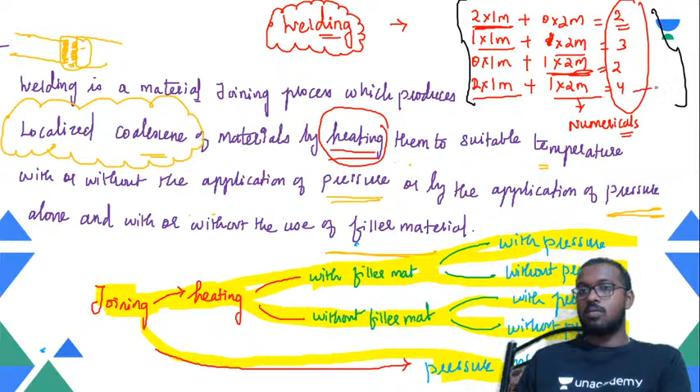So going back to the content, these are the topics that we have completed. In the previous class I said, and you can see here, 2 one-mark questions, or 1 one-mark and 1 two-mark, or 1 two-mark, or 2 one-mark and 1 two-mark. So you can easily expect 4 marks from this. And the two-mark questions will always be numerical ones. We have given the definition, what it means. This was written in the previous class. For all your information, please make a note of it.

So about welding, we have just got this idea, right? What is meant by welding? Welding is a material joining process which produces the localized coalescence of materials by heating them to a suitable temperature with or without the application of pressure, or by the application of pressure alone, and with or without the use of filler material.

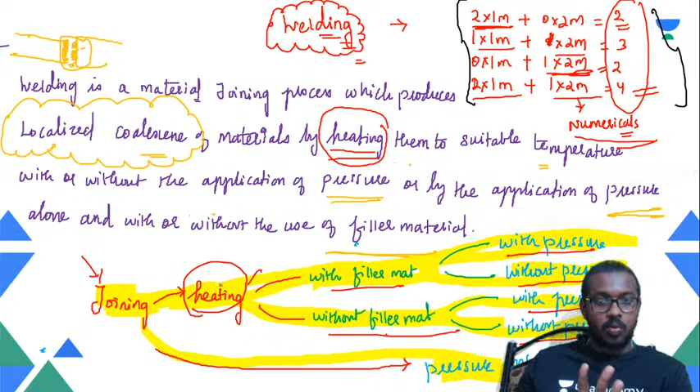Students, joining is all about heating the material with the filler material or without the filler material. If it is with the filler material, if you are doing the heating operation to join, it can be with pressure or without pressure. And without filler material, you can apply with pressure or without pressure, just purely heating, or just the pressure only. That is what the above statement is all about, that I have just broken down and presented here. Maybe this would be really helpful for you guys.

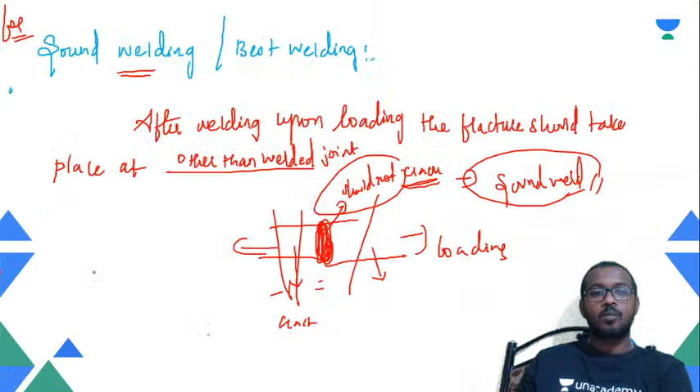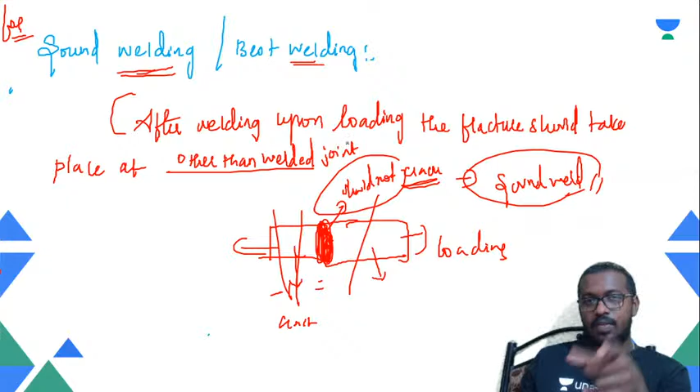So for sound welding and the best welding, my dear people, you have to understand these are some interview-based questions, simple questions. This is the material which is welded, two joint materials which are welded. After welding, if you are loading the material, upon loading, the fracture should take place at a point other than the welded joint. It should not break here, it should not crack here, but at other points. Correct? So this is an important note my students need to understand. Please make a good note of it.

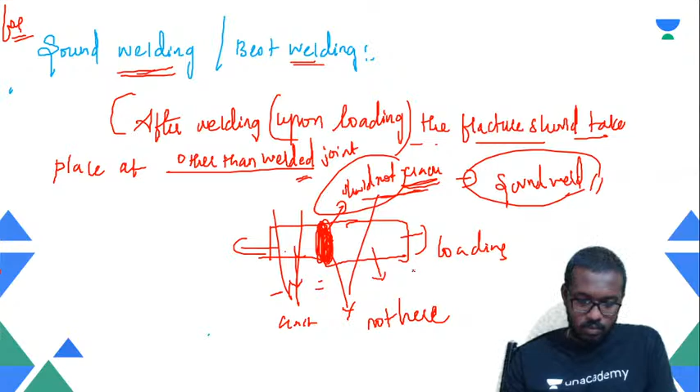So these points we have already discussed: advantages and limitations. One point alone I have to reiterate here. We say that permanent joining is an important advantage of welding. But the same permanent joining becomes a limitation because during repairing and maintenance, you have to break down the permanent joint positions for repairing. Right? So that is the only place where it becomes a problem. So kindly make a note of it.

So I'm looking into the chat box through my mobile phone, so please do let me know if you have a message to convey. I'm glad to reply you back. Students,

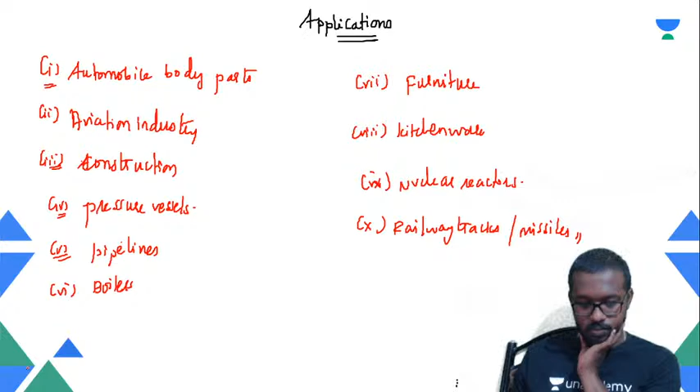Under solid state welding, we know that the parent materials are not melted; in the solid state itself the welding takes place. So joining takes place, where you have the classification of pressure welding, friction welding, explosive welding, ultrasonic welding, diffusion welding, and forge welding. And in liquid state welding, you know that there are many classifications.

It stands for the two materials which are supposed to be joined being taken to their liquid state. That is, the heat produced is able to melt the material. Operating temperature is above the melting point. All these words we can include to define the liquid state. So liquid state welding is majorly classified into chemical and electrical. In electric type, we have arc welding and resistance welding, with subclassifications. And in chemical, you have gas welding and thermite welding. In gas welding, you have the subclassifications.

So liquid state could be autogenous welding with no filler material being used, or homogeneous welding with filler material that is the same as the parent material, or heterogeneous, where the filler materials are different from the parent materials. These cases are for alloying, where you want the filler material to become the alloying element. So kindly make a note of these points also.

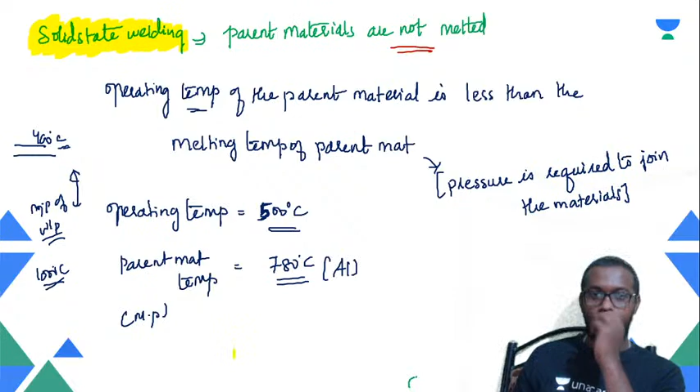And you can have brazing, soldering and braze welding operations over there. So please make a note: solid state welding, liquid state, and solid and liquid state are all defined here.

So coming to the next point, we have also discussed the weld techniques, where you have forehand and backhand, and weld positions, where we have four types: flat, horizontal, vertical, and overhead.

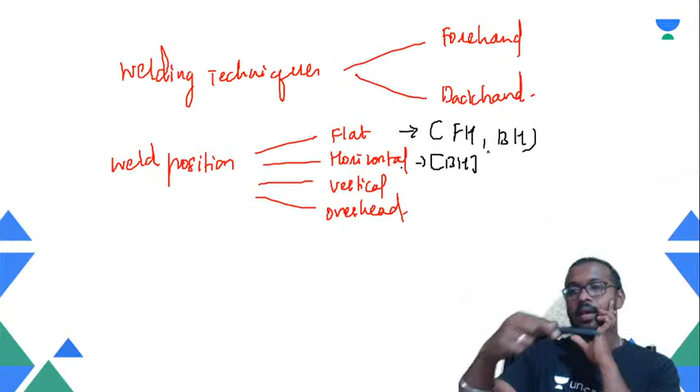In flat, you can do both forehand technique as well as backhand technique. Here there is a shortcut to say it should be backhand technique, because it will not disturb your line of welding. You know where exactly the welding has to be done. That is only possible through the backhand, where your flame comes first before your hand. Please make a note of it. That is an important line, my dear people. Hope everything is clear now for you guys.

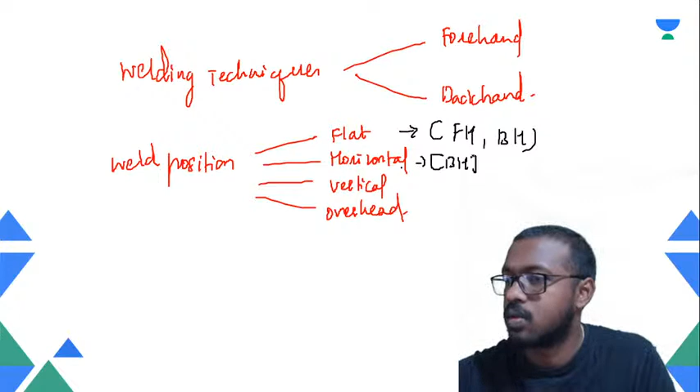So flat with forehand technique and backhand technique. This is a shortcut: HB pencil. We used to say 2HB, HB pencil. You can remember this for the backhand.

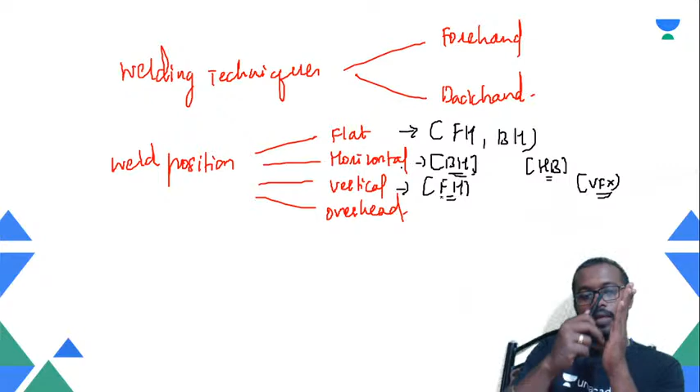Vertical is where it is forehand technique. You can remember the VFX effect, the graphics effect, because the forehand technique will help prevent the molten metal from falling. If you do the welding vertically in this manner, the force from the arc will help the molten metal remain there, rather than doing it in this direction. Otherwise, the molten metal in the welded area will fall down, because the flame, the arc, is already going up. So that is a problem. So we go for the forehand technique.

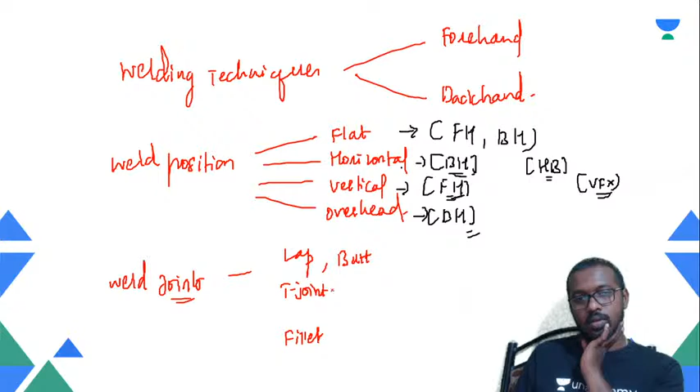And overhead is again where you go for the backhand technique. Please take a good note of it. And the next one is your weld joints. So you know that we have the lap joint, butt joint, fillet joint, T-joint, corner joint, edge joint, and so on. So now, as we know, the title is all about welding terminologies, a few terms that we all have to remember. So those are the points that I wish to share with you. Please have a good look into this content right now, guys.

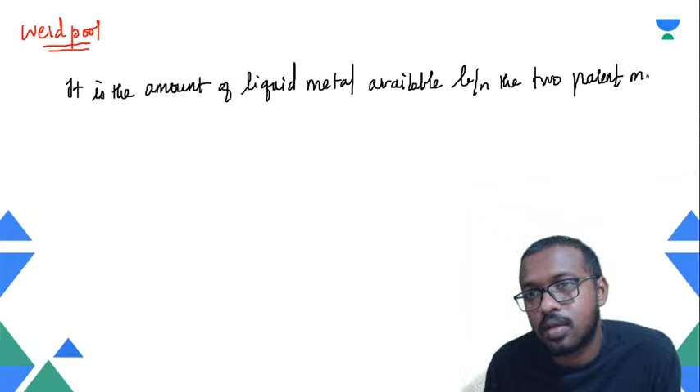It is the amount of liquid metal available between the two parent materials before joining. Okay, before joining. So we can express it in such a way, so like this we are talking about.

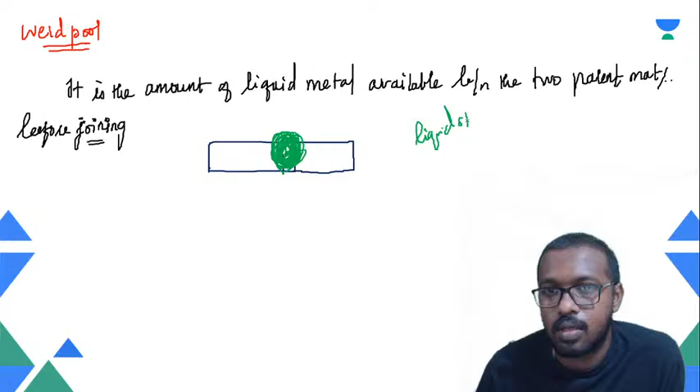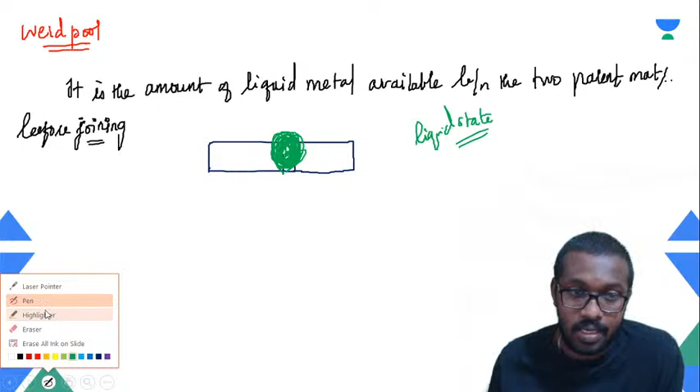Okay, weld pool. So it generally happens in your gas and arc weldings. Liquid state welding is where we can preferably say this. Okay, so it is the amount of liquid metal available between the two. Okay, sir, that is all fine. When we talk about once it gets cooled down, what will happen? In other cases, like resistance welding, we have these points to add. Even there, this is a more interesting term. If you have any points, please do share your thoughts here.

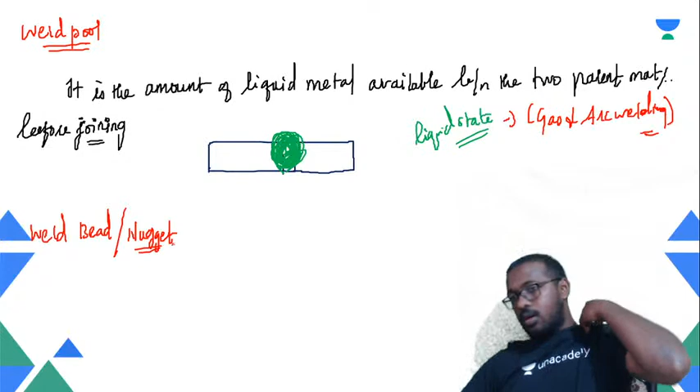So the weld bead or the nugget that we say, especially nugget is in resistance welding. We can particularly say bead is for gas and arc weldings. Okay, we are talking about it in the arc welding factors. So weld nugget, the amount of material which is added into the workpiece or parent material. The amount of material which is added into the workpiece.

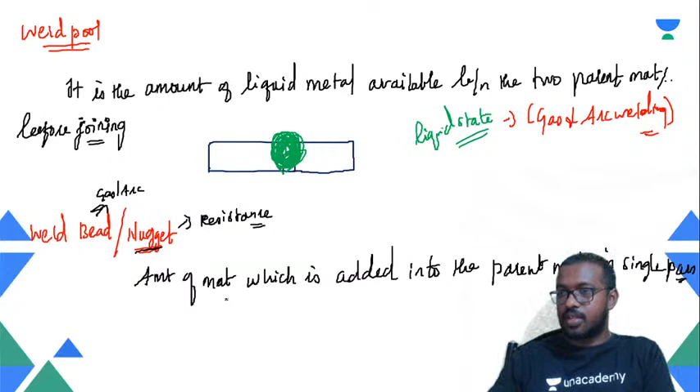In single pass. Okay, in single pass we are talking about. So the word bead is generally what we say in gas welding and arc welding. We can use the word nugget in case of resistance welding. Look at the terms. This is how we interchange the word. Kindly make a note. So next is an even more interesting factor. We are calling it penetration.

Penetration. So penetration, let us draw a diagram. It is the depth to which the filler material can be penetrated into the base material.

Okay, it's not only that way, the arc itself can also penetrate. So it's all about the penetration of the arc or the gas flame or the filler material itself we are talking about. It's a simple note: why we connect it with the filler material is because it is an additional material in the liquid state that can penetrate into the joints. Correct. So the depth to which, with reference to the filler material, we are defining it here.

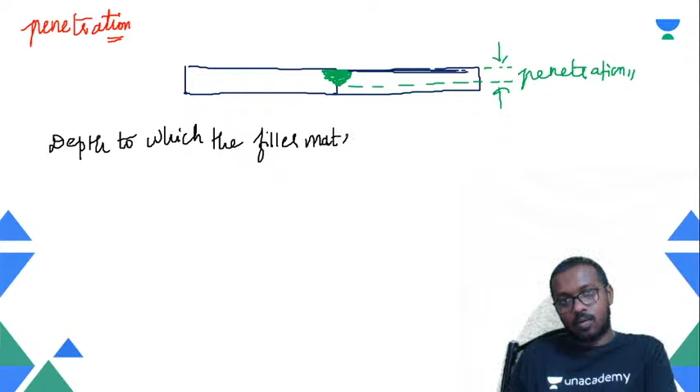The depth to which the filler material can be penetrated into the base metal. So this is what we call penetration. Okay, penetration.

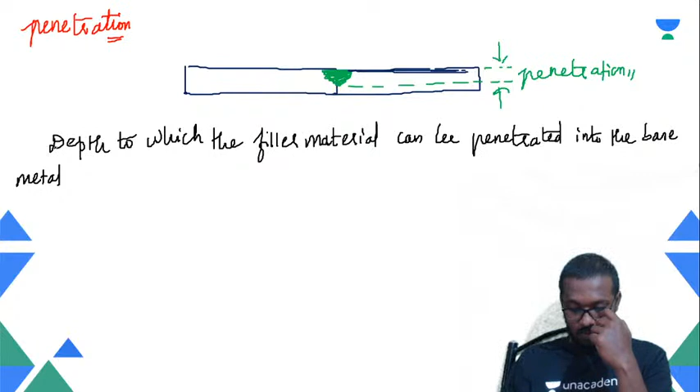And few more points on the rest of the things we'll discuss. But if you have any doubts, kindly let me know. I'm just looking at the chat box. Okay, all good so far. Please do it.

Next is all about root gap. Okay, the root gap. It is the shortest distance between the two materials before joining, especially in cases of joint preparation when it is made. Okay.

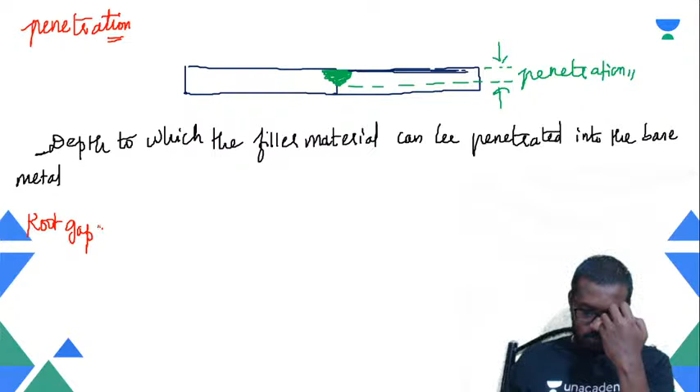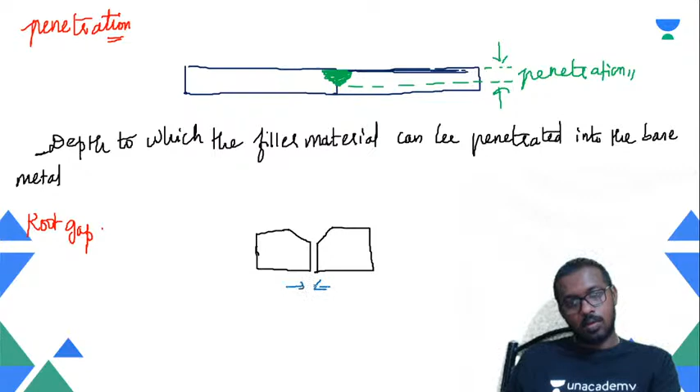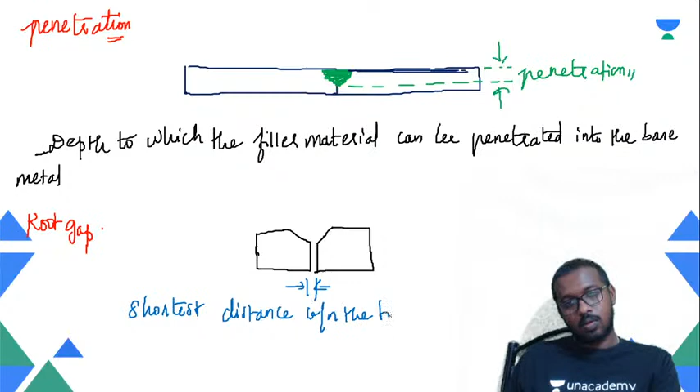Especially in cases of your joint preparations, it is the shortest distance between the two parent materials before joining. Before joining. Okay, before joining we say, yeah.

Okay, yes. More chat messages. No, fine. So I hope you guys are noting it down in parallel.

Let's proceed to the next one. We are calling it the toe. This especially happens in the case of fillet joints, the toe. So you can understand this through the diagram that I draw here. Okay, so here if you draw,

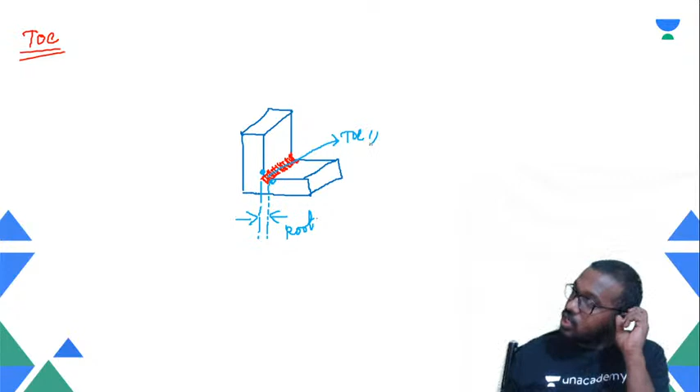right? So here you can call these two terms. There are two terms that I'm going to present here, which are the root as well as the toe, both of them, excuse me. So root as well as the toe we are talking about. So the root is here and the toe is here. So what is that? The junction between the parent material and the weld face. The junction between the parent material and the weld face. Okay, so let me write it here.

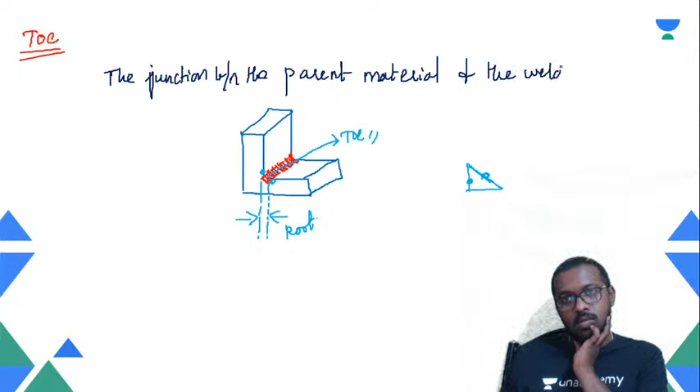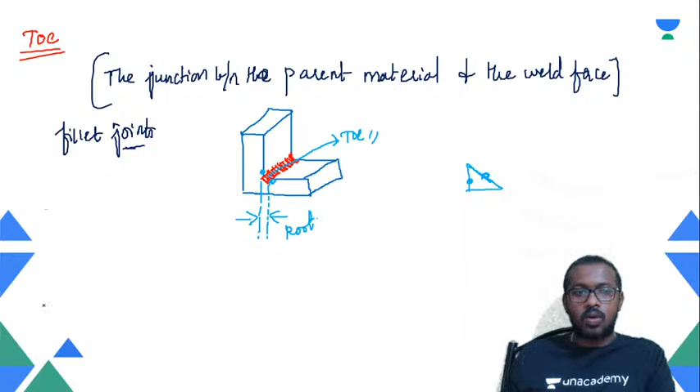Junction between the parent material and the weld face. Please make a note. Right, and it is the case in the fillet joints. Please make a note. And the next one is about the root. So one earlier that we have seen here is all about the root gap.

Here is the root. It is the point of the deepest penetration in the fillet joint. It is the point of deepest penetration in the fillet joint. Okay, how deep it is. So you can see the deepest point, right? So this point to that front, how much from that you can say.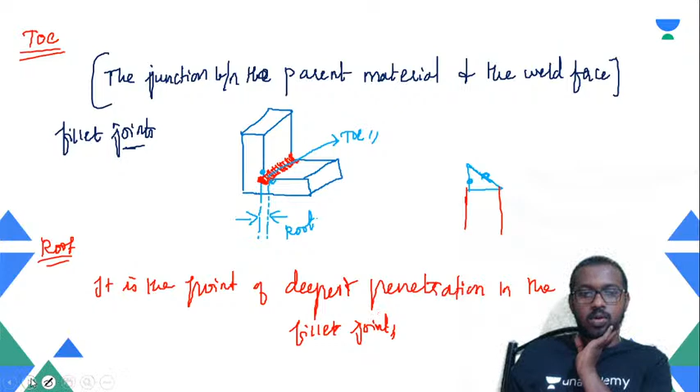So here it is all about the root. So you can see the difference between both the terms, right? From the toe to the root and everything. And one more point is about the throat. Throat is another point from the same triangle we can introduce when a fillet joint is being made. Okay. The shortest distance between the root and the weld face. Shortest.

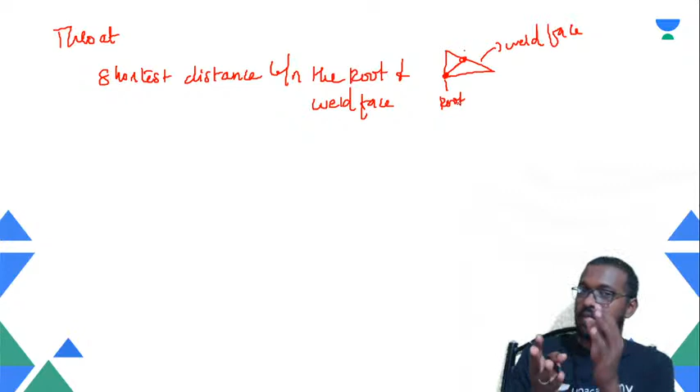You know that this is the weld face, and this is the root we are talking about. So from that point to this depth, we are calling it as throat. So additionally, these points are collectively from gas or arc and everything, right? So I have to introduce these further points which we might come across in arc welding, but I want to connect it here as well. So I'm giving a new page for that, which we are calling it as crown. A very important diagram which we need to know here.

So I don't have special tools, so I have to go with the simplest hand sketch. And you know what, the better engineers or the best engineers are the ones who are able to perform in the least helpful conditions. They are able to show up. Okay. I don't think this is required here for now.

Crown, let me bring it here. Okay, crown, let me say here what is the point. So here we have to particularly share the point. Here is how the crowning takes place, right? The welding would take place like this. Right? So until this point we are talking about. So this crowning. Can you see the point here? So you can understand these three terms I'm reintroducing. One is a point we have already discussed.

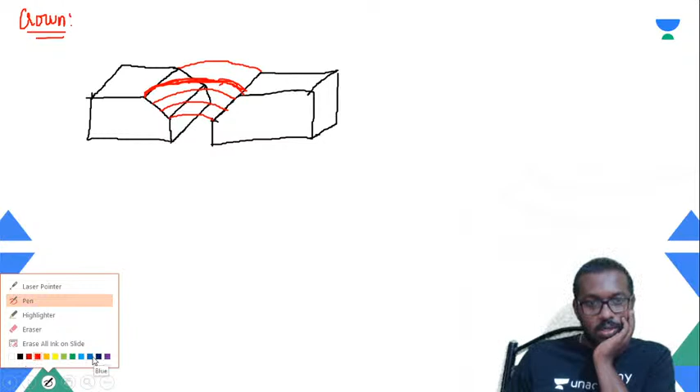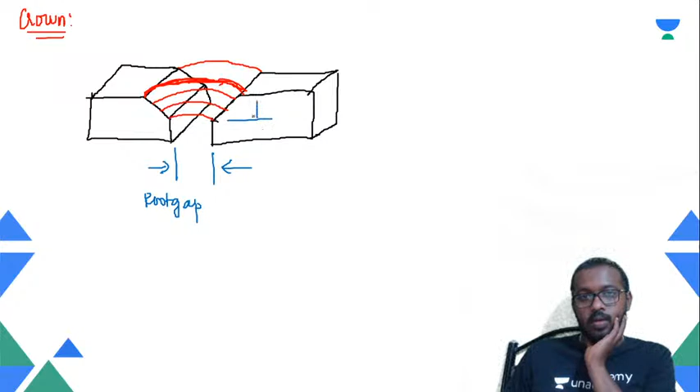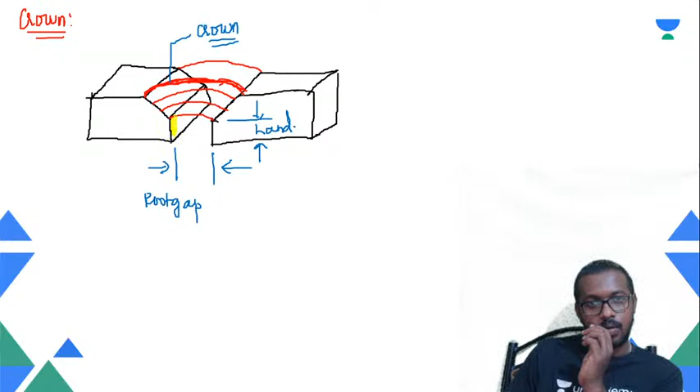What is this point, sir? We are calling it as a root gap during the joint preparation. What about this point? We are calling it as land. And what is this? We are calling it as crown. So the straight portion of the plate. This is the straight portion of the plate. I'm just painting it. Correct? The straight portion we are talking about.

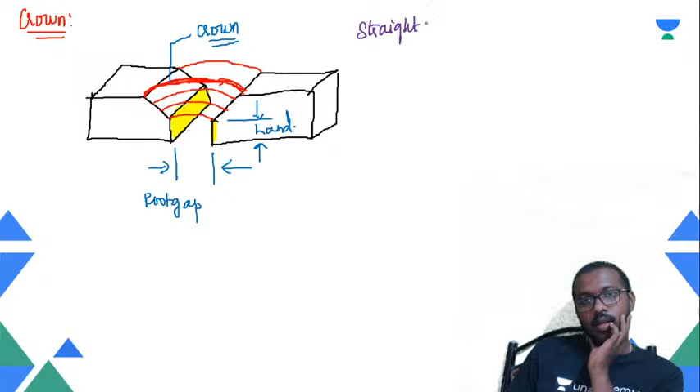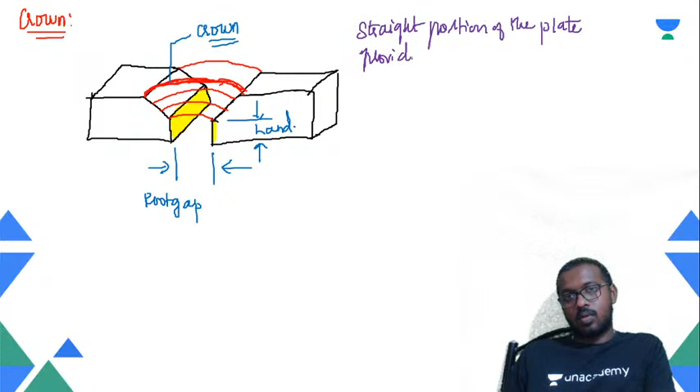The straight portion of the plate provided at the bottommost point of the joint without any joint preparation, right? We are calling it as land. But we know what is meant by root gap otherwise. So root gap is a point that we have already discussed.

So it's a straight portion of the plate provided at the bottommost point of the joint without making any joint preparation, that we are calling it as the land. So we don't have any kind of joint preparation over there. No V, no U, right? No J joint, nothing will be there.

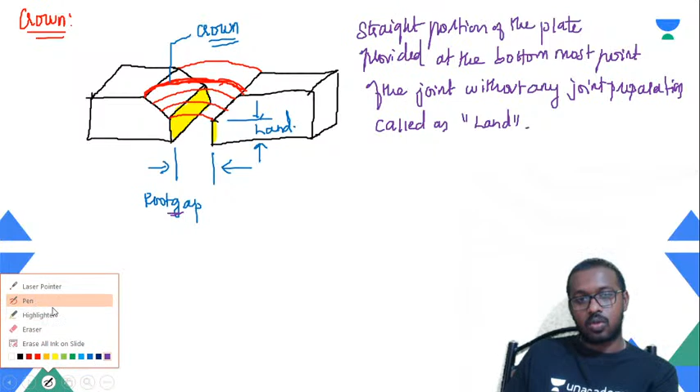So in the non-favorable conditions, when you are able to present yourself with a freehand sketch, that's where the true engineer evolves, is what I used to hear from my professors in my college days. Because in engineering drawing, we all go with our draft and everything, but the drawing is all about making the other person understand, right? Without the language barrier, you can still convey through the drawing what your expectation is. So that is the most important thing. So we have to always be ready for presenting it.

So what is meant by crowning then? The excess material more than what is required. So you can see this. This is the line we are expecting. So above this, all this material is excess, right? All this material becomes excess. The excess material provided over and above the surface of the plate.

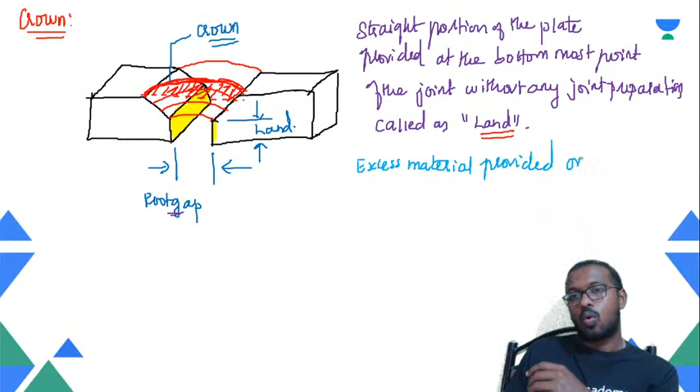Excess material provided over and above the surface of the plate is called crown. Is called crown, my dear guys. Okay, so this is an important term which we all have to note down. So next comes your deposition rate and the number of electrodes as well. So some terminologies that I want to connect with you so far.

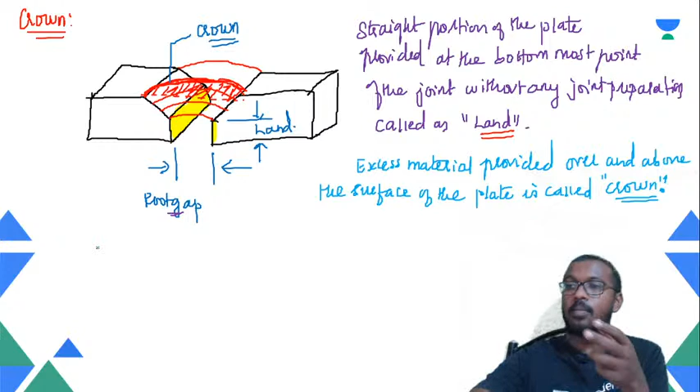How many number of electrodes that would be required, there is where this crowning term comes into picture. Okay, please make a note of it. The crowning term comes into picture when there is a term on the number of electrodes. Okay, so we will be using those terms. Please make a note

in the upcoming classes. Now to the next heading, we are calling it as the deposition rate. Okay, deposition rates. This is actually in your kilogram per hour condition we are talking about. So the amount of material, like the melted parent or the filler material, whatever it could be. Okay, please underline this word. The amount of material which enters into the

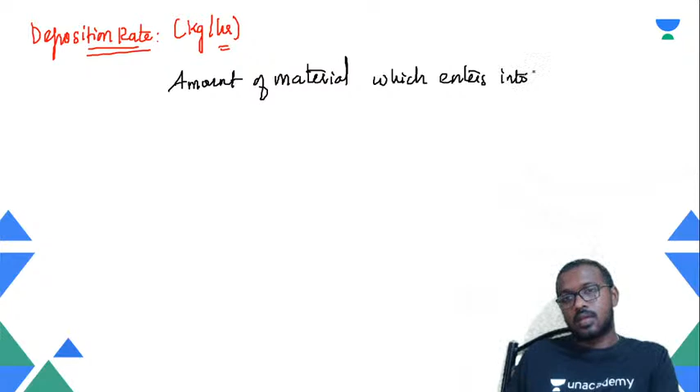parent material. So here, when we say the amount of material, I said to underline. You know why? It could be the melted parent material or the filler material. It could be anyone. So amount of material which enters into the parent material per unit time. Again writing it per unit time. Okay, so it's more about a question in the numericals. You can expect this kind of a one. So please make a note of it.

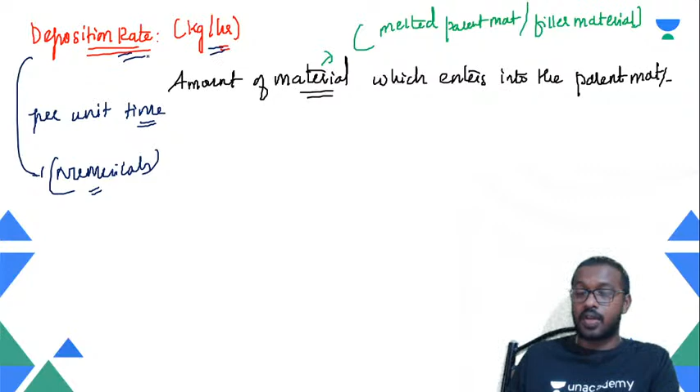So it's all mentioned in terms of kilogram per hour, and this deposition rate has a lot of connection with your direct current straight polarity, direct current reverse polarity as well. Between them this deposition rate plays a huge role, and that's where your non-consumable, consumable electrodes. So all these are getting interconnected now. How many number of passes will it be if welding speed will be high or low? Okay, high or low, and

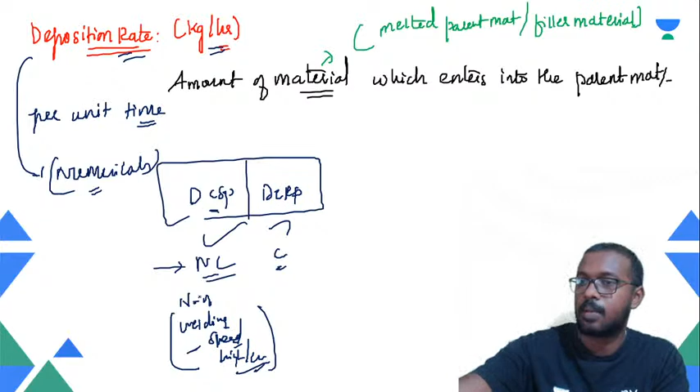these factors. So for the non-consumable, the DCSP, the welding speed, and all the deposition rate, these are well connected between them, my dear guys. So have a good note of this. I hope it is clear to all of you in this regard. Make a note. Okay, so the deposition rate, and the next comes your flux.

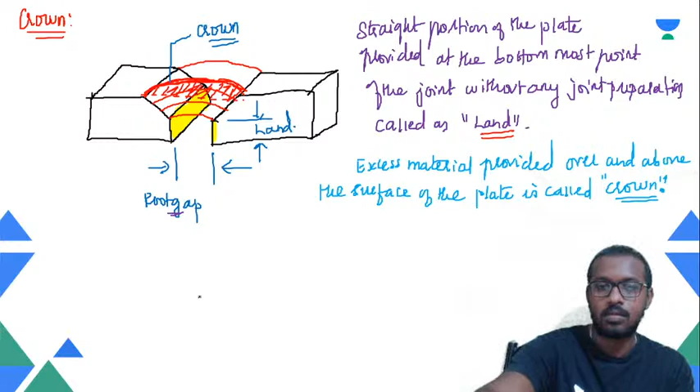Flux. So next is your flux form. Flux and filler materials, we try to complete it. So flux is commonly used to deoxidize the material, especially in case of your gas weldings, and prevent it from getting oxidized. Okay, and the flux helps in forming the slag over the weld bead. So you can see the word what I have used, bead, that is all for your arc and gas weldings.

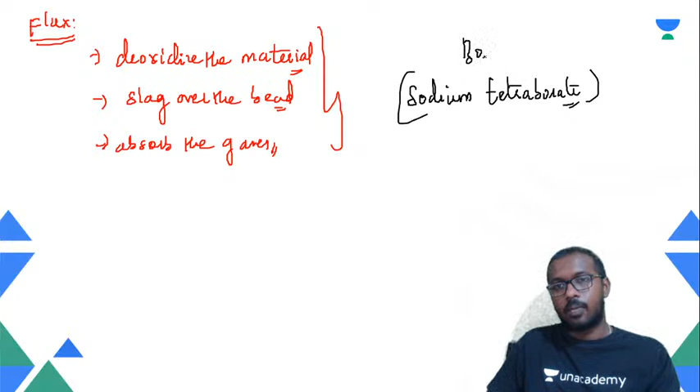Remember the term. And it also absorbs the gases. So that's how the deoxidation takes place. If not, how it can be done, right? So this is how the deoxidation takes place. The commonly used flux materials are the sodium tetraborate. There are a few more, but let us understand the sodium tetraborate, commonly called as borax. This is the flux material majorly used.

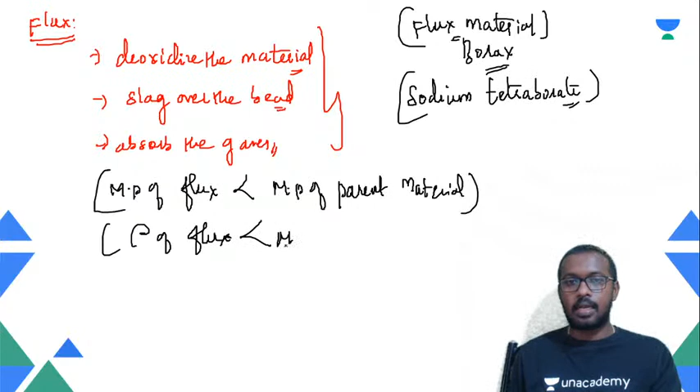Okay. The melting point of the flux should be always less than the melting point of the parent material. Only then the flux can easily protrude into the weld pool and prevent the material from oxidizing, right? And also the density of the flux should be less than the density of the parent material here. Please take a good note of it, the parent material. Okay, it should be less here as well. Students, please have a good note of it.

Any messages here, most welcome. I would like to hear from you people and clarify the doubts of yours accordingly. So just giving you a minute of time to note down these points, and then we can proceed further accordingly.

Okay, so about the gas welding, and we have one more point on the torch angle also to complete. So those are the points I would like to complete prior to getting into the gas welding topic. So please make a good note of it, guys. And we'll move on to the flux filler material right away. Okay, filler material.

So the filler material is all about the addition of the material. It could be same as the parent material or different from the parent material. But especially look at the condition why filler materials are generally used. Okay, why they are used. For this reason. And here.

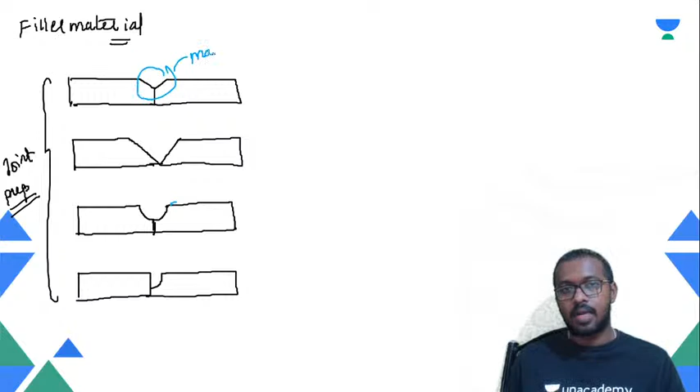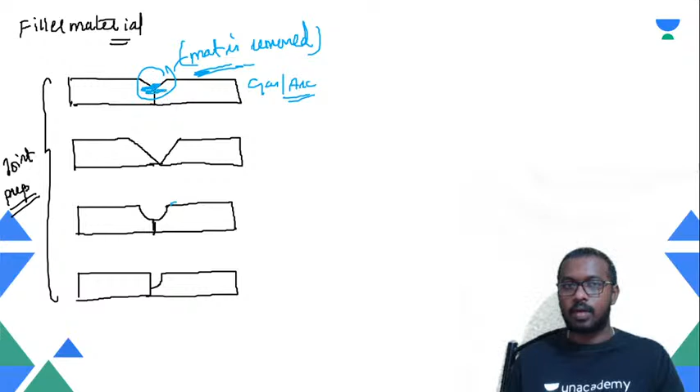What you can see here, joint preparation has been made. So what I would like to share, my dear guys, is the addition of material. See, the material is already removed from this place, correct? Now if you are trying to weld the material by gas or arc, between these two, the material will melt and deposit here. So what about this area? It is unfilled.

To fill the unfilled area, we use filler materials, correct? The gap cannot be filled because there is no metal to fill. If these two materials are to be joined, and if you melt it, sufficient material will be available because no cut has been taken. But since the material has been cut in order, this cut is required in many occasions because the strength will be more, particularly over there.

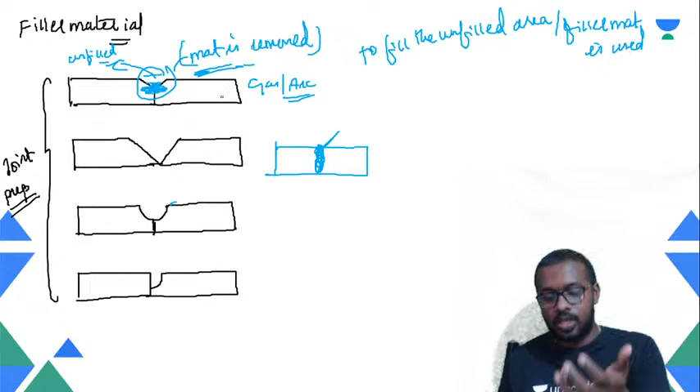So when there is a joint preparation made, especially to fill the unfilled area because of lack of material available at the production, filler materials are used. The addition of material could be either same as the parent material or different from the parent material, to fill the gap. This is where filler materials are used.

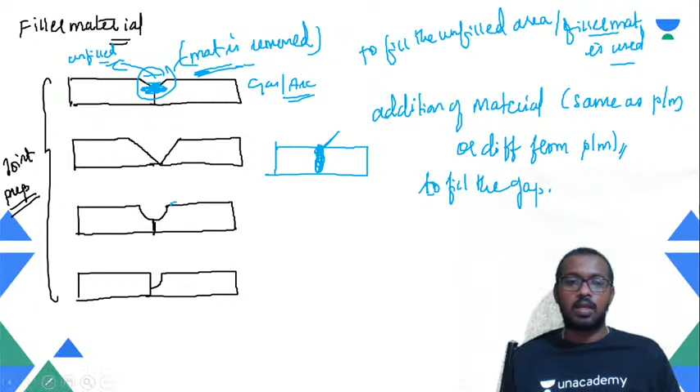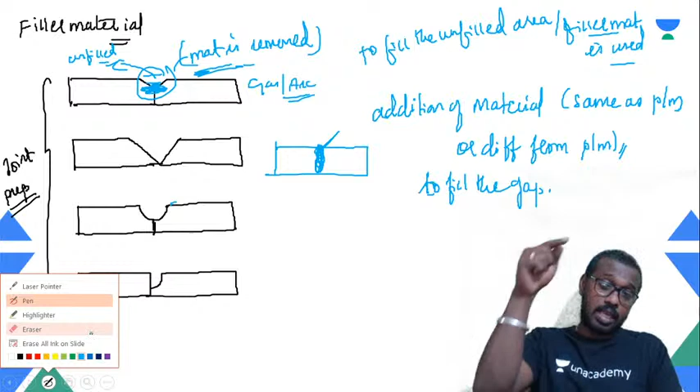It could be, like, two steels getting welded to be joined with a special joint. If I want to use a filler material, it can be same as the steel, same composition, same alloy. Or it could be any other material added as an alloying element, so the joint could become even stronger. Any properties I want to improve over the joints, I can do by adding a different material as filler. This I wish to convey to you people. Please make a note of it.

Good morning, sir. Good morning.

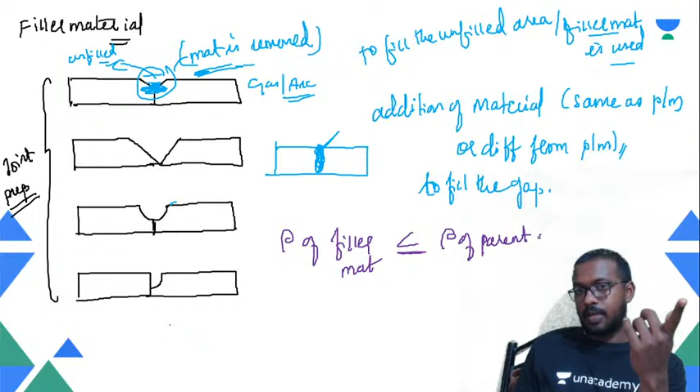So the density of filler material is less than, or could be equal to, the density of the parent material—the equal sign applies if the filler is same as the parent material. In the previous case we are not doing it because the flux will always tend to be of lesser density and lesser melting point as well.

So the melting point of the filler material is less than or equal to the melting point of the parent material. Students, please make a note of this. So next class will be even more beautiful, I can assure you.

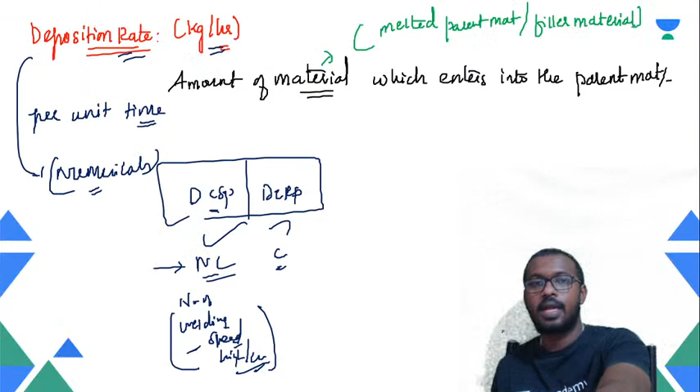So just giving a quick recap of the terms we have discussed here from the weld pool. I have the last topic, torch angle, to discuss before we conclude for the day.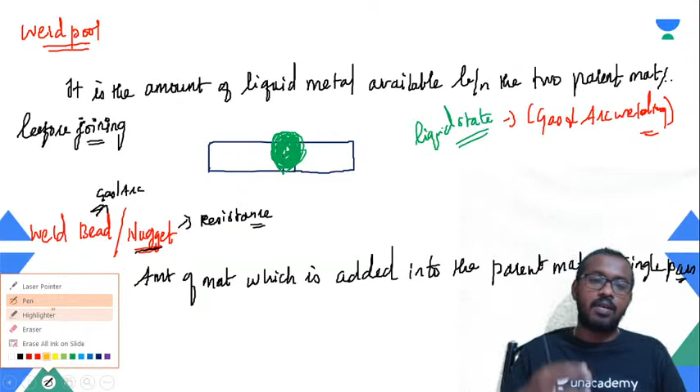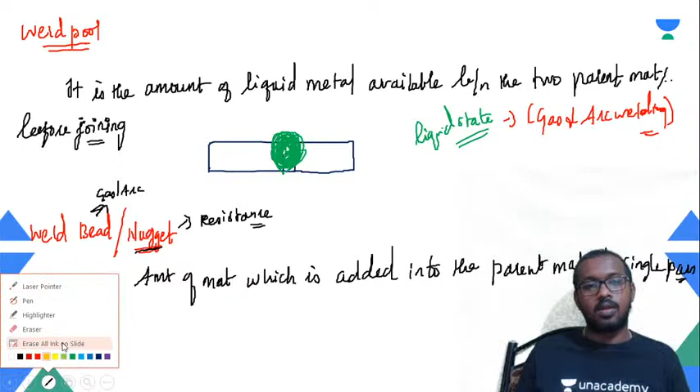Karthikeyan sir, Rupesh Maurya, PUBG as well. Okay, great. So we have discussed the weld pool, weld bead or nugget, penetration, root gap, toe, root, throat, crown, land, deposition rate, flux, and filler material.

Now moving on to the next topic, torch angle—very interesting one. Look at this, you can understand the definition of torch angle from here. So the angle made by the axis of the torch with the axis of the workpiece.

This is what we call torch angle. Sir, if you're doing it in this direction or like this, can you see the difference? If this is the base of the workpiece and your torch is presented in this direction, you can see this is the angle. Or if it is going up, the angle is even more. So please make a note.

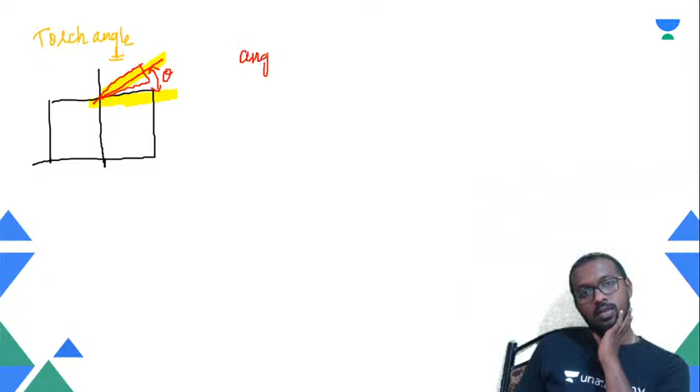Angle made by the axis of the torch with the axis of the workpiece is called torch angle.

So this is going to impact the flame density. This indirectly hints at flame intensity or flame density. What does flame density mean? It's the amount of flame concentrating over the area to which the flame is exposed. This is what we call the torch angle. Please make a good note of it.

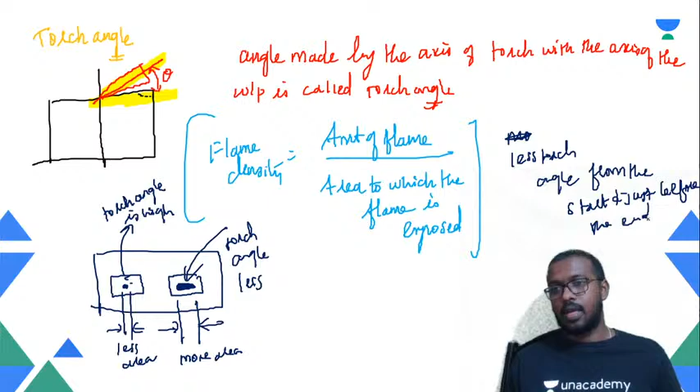So during the start of welding especially, you can go for a less torch angle, from the start and just before the end. There is a deeper meaning in it, because when you start welding with less torch angle, it spreads a lot, but when it reaches the end point, you can't do it the same way, because the molten material may be forced to go away, getting the idea? Forced away.

Why does a less torch angle cause it? Because the force of that flame, gas flame or arc, will make the molten metal get thrown out. So at that particular junction, you have to maintain a high torch angle, thereby just melting it. So you go from here to here almost with a low torch angle, but at the end you have to make it like this so the molten metal won't be thrown away. This is the most important point here, so please make a good note of it.

Right, my dear students? I believe it is loud and clear to you all. So there are three occasions of torch angle that have to be related to the thickness of the workpiece.

If you have a better thickness of the workpiece, and considering the melting point of the workpiece, and in the other case, the thermal conductivity of the workpiece.

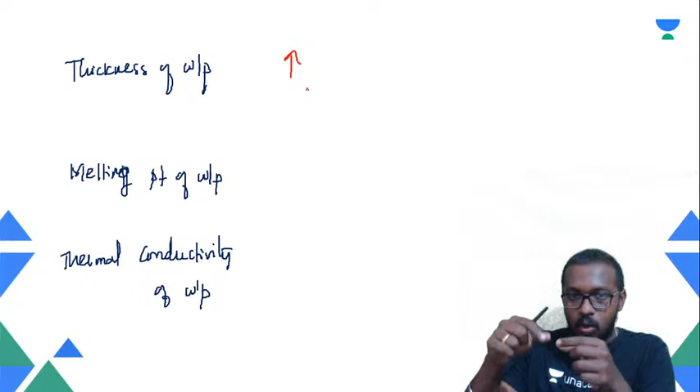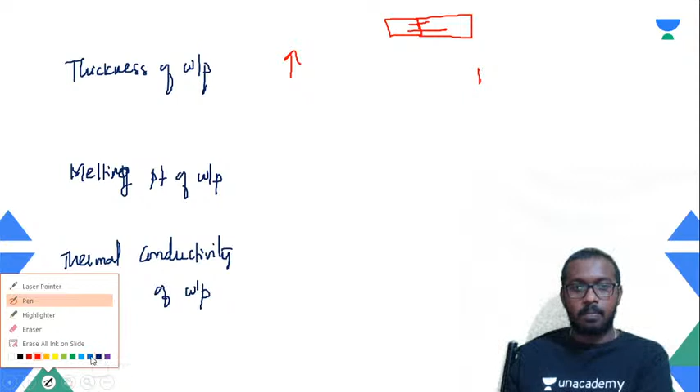So when the thickness of the workpiece keeps increasing, I have to weld the material, meaning the penetration demanded is higher. For this penetration, what do you have to do? You have to narrow it down to that junction, so the welding will have better penetration. So you need better penetration, how should the torch angle be? For better penetration, the torch angle should be higher.

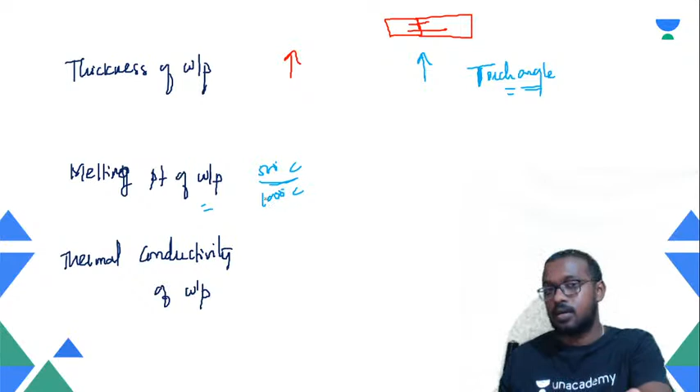So the lower the penetration required, you can maintain a low torch angle, but the higher the penetration or the higher the thickness of the workpieces to be joined, definitely a higher torch angle is to be maintained. Talking about the melting point of the workpiece, say a 500 degree Celsius material versus a 1000 degree Celsius material, you have to focus a lot of flame onto that junction for welding to take place quicker. So if the melting point keeps increasing, definitely the torch angle also has to increase.

And in the third case, it is about the thermal conductivity of the workpiece. It is to be noted, if the thermal conductivity keeps increasing, meaning if the thermal conductivity is higher, definitely you have to expose more of the flame or the arc, so you have to maintain a high torch angle as well. Please make a note of this as well, it is very, very important. It's the important line I want to share here.

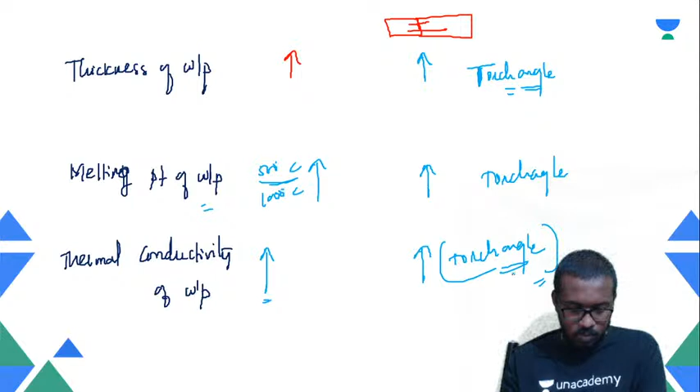Great. So these are the two classes we are supposed to complete here, torch angle as well. So students, hope you all got the clarity.

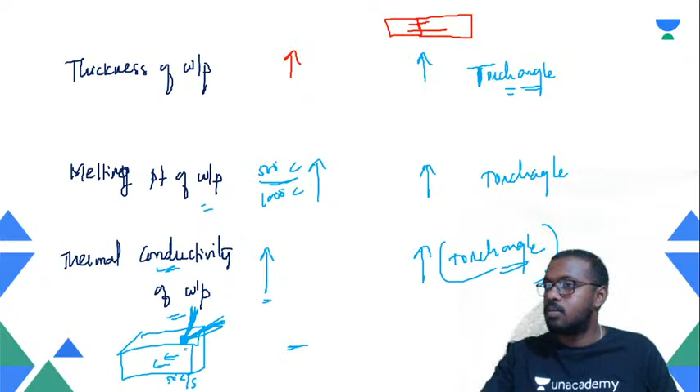Sir, can you explain the thermal conductivity here? We know that if you are heating the material with a low torch angle, the material is able to conduct away 50 degrees Celsius per second. If you maintain a high torch angle, the supply of heat to that point will be more, so the concentration is higher, and it can easily get melted comparatively. So the heat conducted away versus the heat supplied - if you improve the heat supply, the melting will take place quicker. So more time will be required for a lower torch angle.

If low torch angle, more high welding time, right? Lengthier welding time we can say. So this is why, to overcome the burden of welding for a long time, thereby increasing power consumption, the total cost of joining would get increased. To improve on that, we go for improvising the parameters to get a sound and economical welding as well. So the conclusion over the torch angle is that theta, your torch angle, is proportional to your melting point. Theta is proportional to the thickness of the workpiece. Theta is proportional to the conductivity of the workpiece as well, so it increases. Okay, these are the points my students have to note down when it comes to welding terminologies. Kindly make a good note of it, and we have to proceed to the other terms.

So we have done with the basics of welding terminologies here. About the efficiency and other stuff, we can discuss it in the upcoming class. The gas welding, everything will be discussed in the upcoming class. So just to inform you again, the upcoming class is all about the gas welding part, to discuss the types and everything. Also, if we complete that, we will continue with resistance welding instead of arc welding, because that topic we can conclude at the earliest as well.

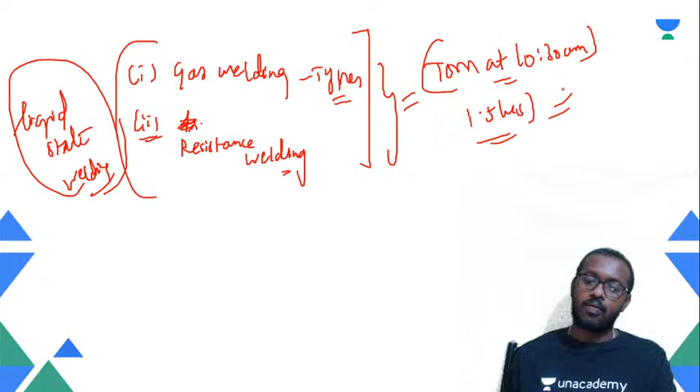So we all know these two come under the category of liquid state welding, right? We'll be completing these terms for your information. Okay, have a good note of it as well. Yes, we will be discussing them in the next class, that is tomorrow at 10:30 a.m. It will be a quite lengthier session, more than 1.5 hours we'll be discussing that. So looking forward to having you all in that wonderful course. Do join, guys. Thank you.